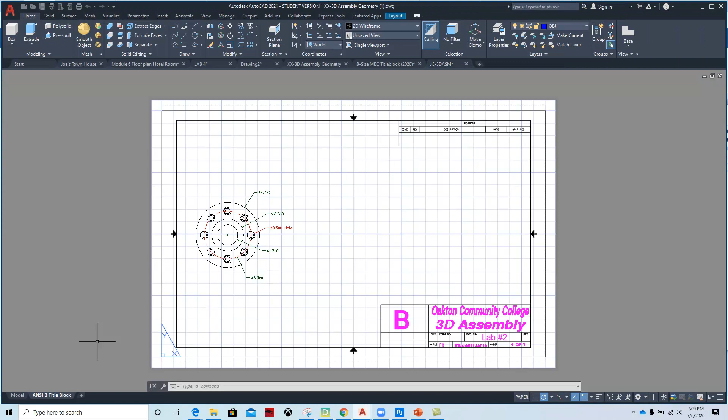What I've given you is the title block, and the two-dimensional geometry, because this exercise is really a very symmetrical exercise which uses the same geometry. We just extrude it up for the top assembly piece and down for the bottom piece.

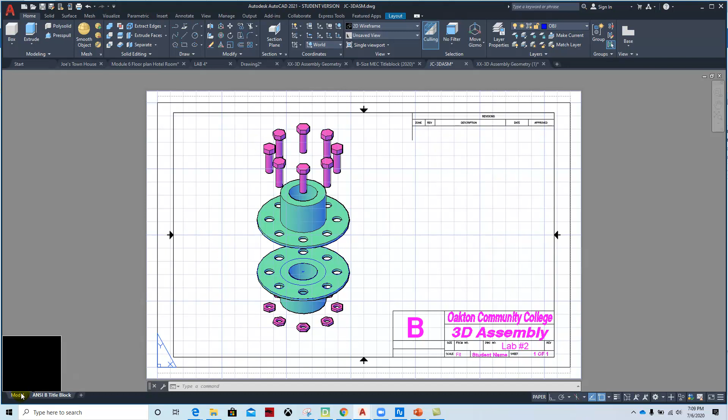So what we'll do then is we'll switch over to model space, and then we'll grab a top view. I'm still in my master drawing, so let me switch over to the drawing. Here we go. So we'll go to model space, and we'll just pan and zoom to take a look at that.

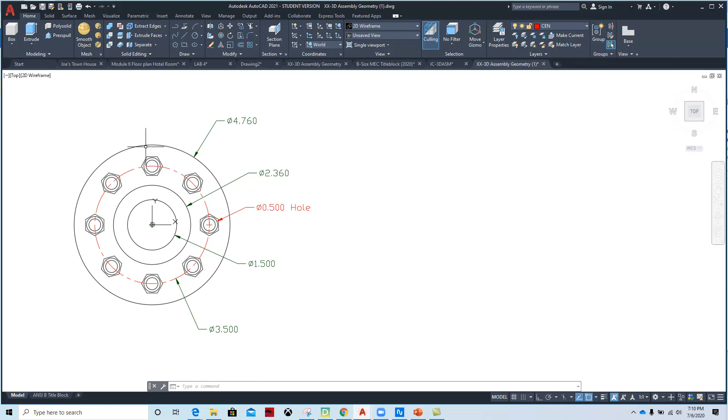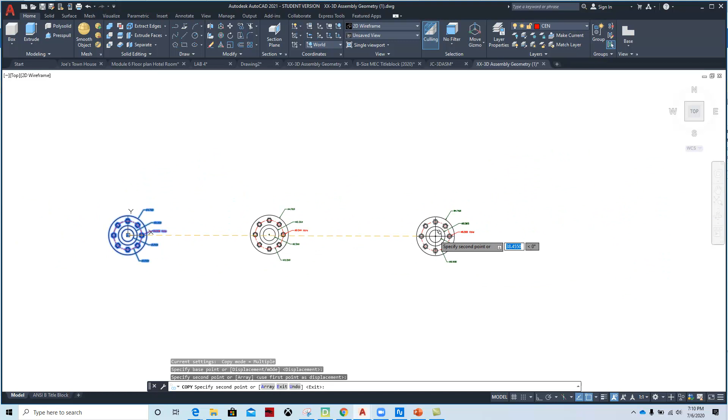Basically what we have is a circular shape with a bolt hole pattern. So what I'm going to do is go through and copy that, two times. I'm going to select the base point, and drop a part off right here, and then drop another one off here. Now I'll hit escape. So I took the one and copied it twice.

I'm going to keep this one for the 2D geometry, and this one I'm going to turn into 3D. I don't need the dimensions, so I'm going to delete those. I don't need the center line.

To model this, we're going to switch over to the 3D modeling interface. I've already got it on there, so I'll switch to the 2D so you can see that, and then I'll switch over to 3D.

What 3D modeling does is it gives you a different menu set to work from. So the next thing we're going to do is put the bolts onto a layer, and turn that layer off.

So I'm going to go to the layer command, I'll just type it, L-A-Y-E-R. I have a difficult time between interfaces finding things like layers and buttons, and if you type the commands, it works very quickly.

On the layer command, I'm going to make a new layer, and I'm going to call it nuts dash bolts. I'm going to make the color for that purple, and give these a line weight of 0.5.

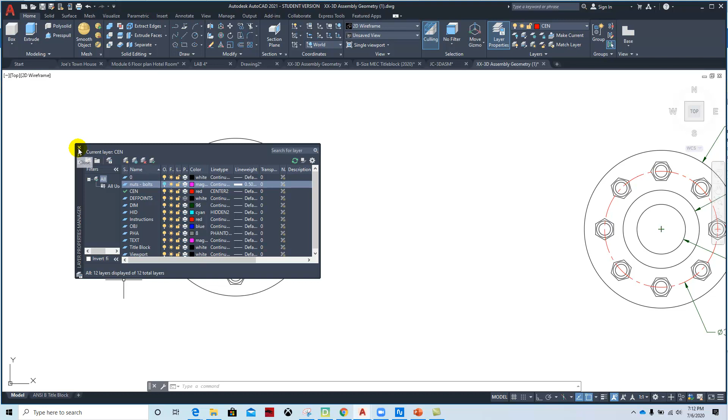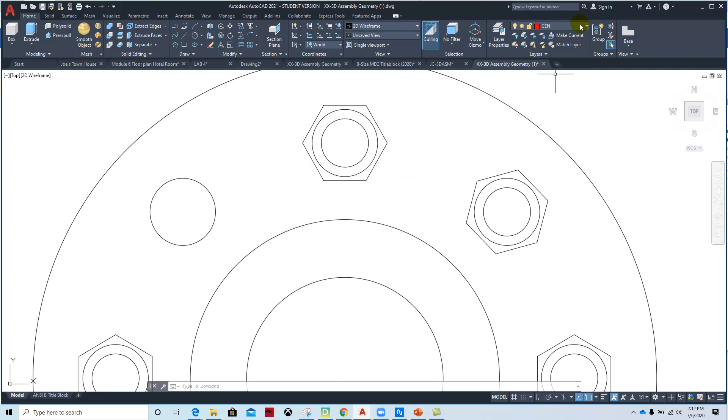Then I'm going to put that geometry on the nuts and bolts layer. If I turn that layer off, you'll see the items disappear when I do it. So I'll click on the geometry for one of the nuts or bolts, and put it on that layer. Here's my layer, I'll put it on my nuts and bolts layer, and it'll disappear. If I turn that layer back on, you'll see the geometry.

The reason I'm doing it this way is it's much quicker to use a press pull command than it is to use an extrude command.

So I'm going to do the same thing again. I'm going to go and put these on that layer, I can just click on them with grips. Then I'll go over here and put it on the nuts and bolts layer, and close it. I'll do the same for the other ones.

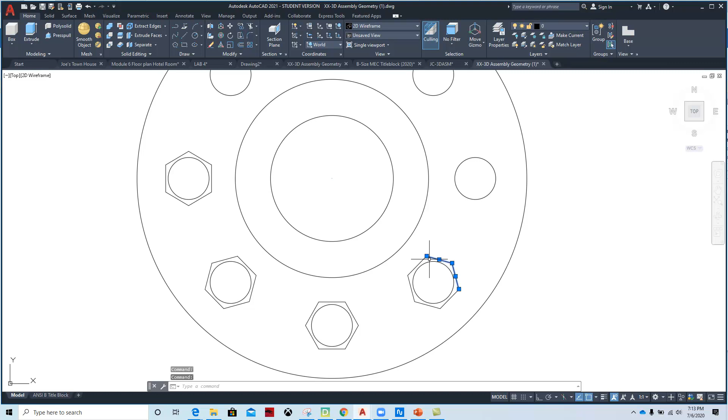You don't have to do them all at once, you can do some of them at a time. You'll notice they'll disappear as I do them, because I've turned the light bulb off on the nuts and bolts layer. So by using layers, it helps you clarify what you're working on without having so much geometry.

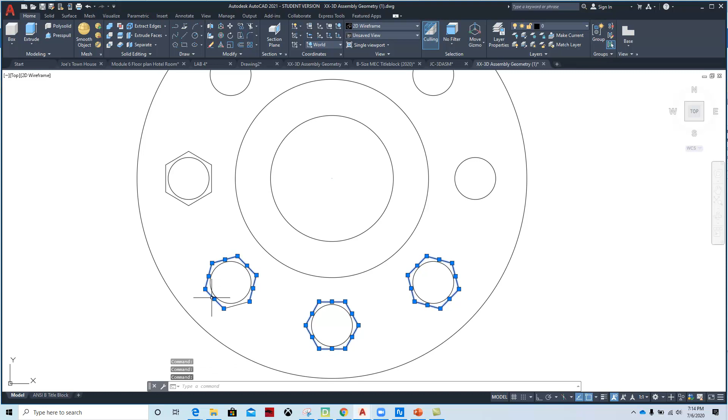And I've got one more left.

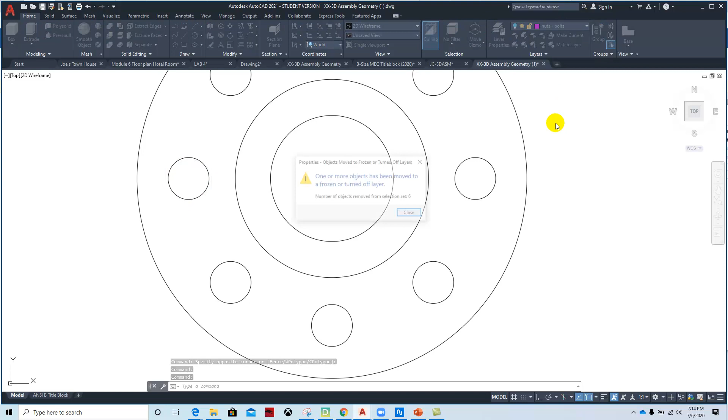Now that we've done that, the next thing we're going to do is press pull this part. I'm going to switch over to layer object, and then change my viewing angle to a southeast isometric.

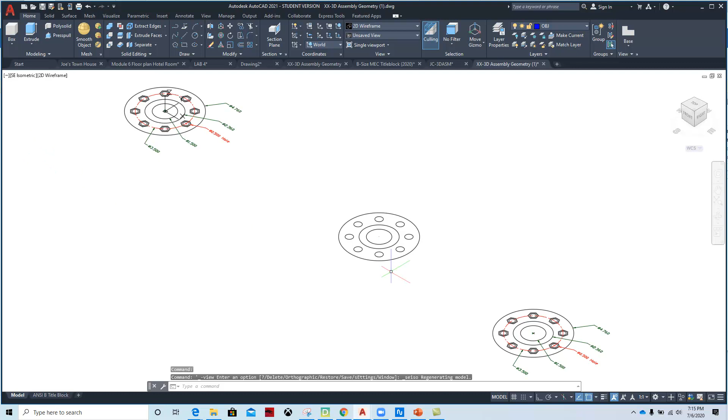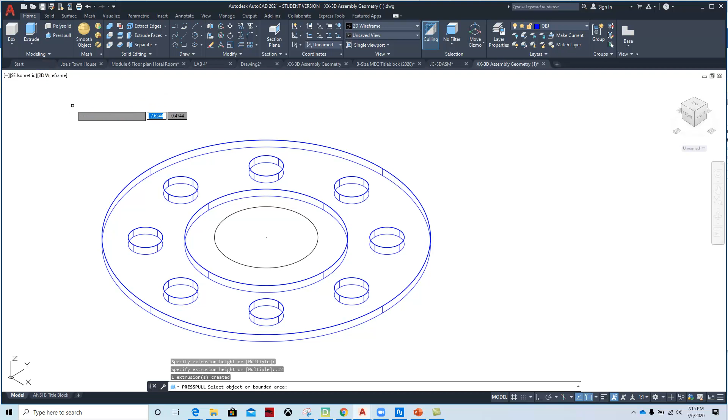I'll zoom in on it, and then press pull this down 0.12, which is on the dimensions. So I say press pull, hover, click, push down, 0.12, enter. Then if I want to, I can verify this by hitting escape or right clicking and going to conceptual. You can see it pressed and pulled the geometry.

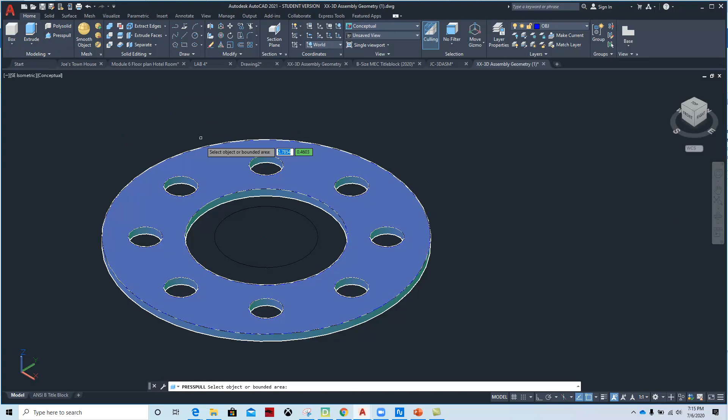Now if I want to pull this up, I can pull it up in the other direction, and it's going to be 1.75, which is the dimension of 1.63 plus 0.120. So I'll say press pull, hover, click, pull that up, 1.75, enter. I'll hit escape. Now you'll notice these two pieces have been modeled, but they're separate.

I can say move, and I can separate them. So I'm going to hit escape here, or undo.

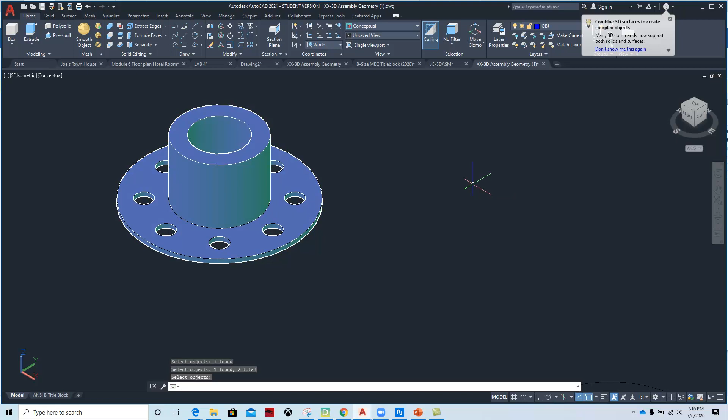What we want to do is create a Boolean property called union. So what I'll do is say union, select this geometry and this geometry, and hit enter. What that'll do is fuse them together. So now if I try to move it, it'll treat them all as one piece.

So if I say move, select it, it does leave the initial geometry underneath it, which is really pretty cool because we can use that instead of making a copy. But at this point we'll leave it the way it is, so I'm going to undo that.

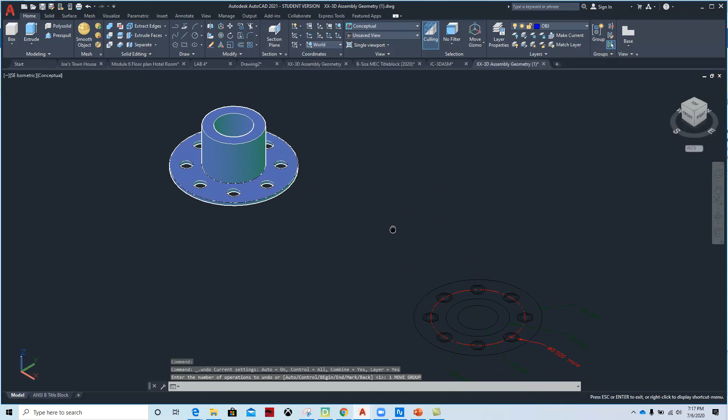Okay, so that's how we would do the top part of it. And then what I want to do is turn on the layer for the nuts and bolts.

I'm going to go out of conceptual to 2D wireframe, and I'm going to need to move this other geometry up. So I'll toggle over and switch to my nuts and bolts layer, click on it, and then turn off my object layer. Then I'm going to grab the nuts and bolts and move them up.

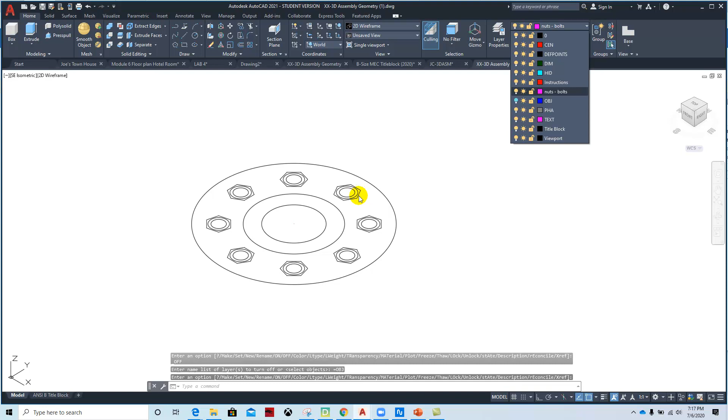Now that we've modeled this component, we're going to model the bolts that go above it. So I'm going to change from conceptual to 2D wireframe, and I've turned on the nuts and bolts layer. If you turn off the nuts and bolts layer, and then turn it back on...

The next thing I'm going to do is move these up in the Z-axis, using the 3D move command. So I'll say 3D move, select this inside circle, hit enter. Then I can grab the rocket and just drag that up. I'm going to move that up 3 inches. Then I'll do the same for the other geometry around here.

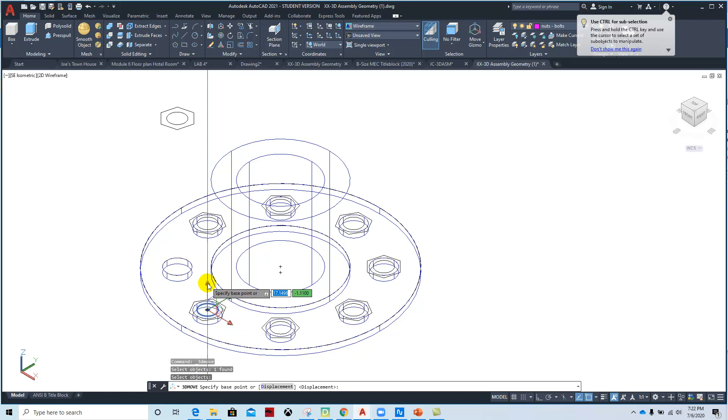So I can say 3D move, hit enter, grab the rocket, and then you can either bring it up with O snap, you can see it object snaps to the center, or I can just type in 3 and it does the same thing. So one more time, 3D move: grab this circle right here, hit enter, grab the rocket, push it up, type 3, enter. And then do the same for the geometry around it.

3D move: build your selection set. And if you grab something like I did here where I have the wrong one, hold shift and unselect it. So now that I have the geometry that I want to move, I hit enter, grab the rocket, and then go 3, enter. For some reason it doesn't seem to want to grab that other geometry, so I'll just do it again. 3D move.

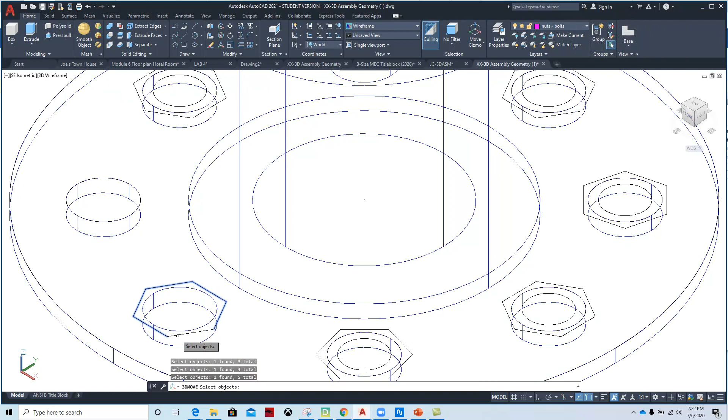Enter, grab the rocket, 3, enter. Now you can take the view cube and spin it, and see the different angles, or you can hold the shift key and turn it with shift middle mouse wheel. So what I'm going to do is move the rest of these up.

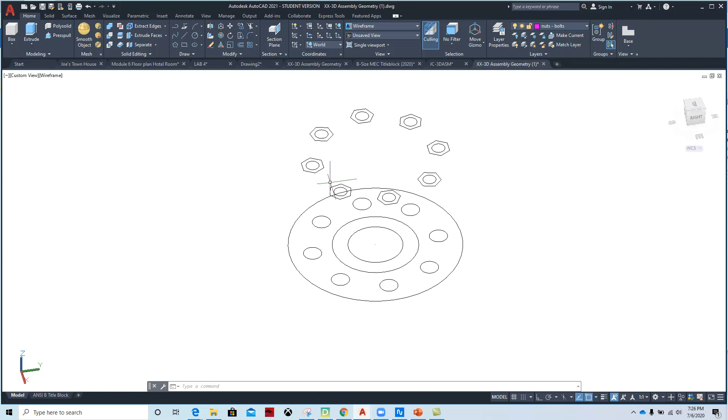All right, so I've 3D moved all of the bolt patterns to a height 3 inches above it. If I turn my object layer back on, you can see it. If I hold shift and push the middle mouse wheel, I can rotate it, and you'll notice that the view cube moves as well.

And then what I'm going to do is take these objects and extrude them. Now before I do, I need to join these shapes. So in order to get these to work, I need to make these shapes from individual lines into a continuous boundary. And the way I can do that is with the region command.

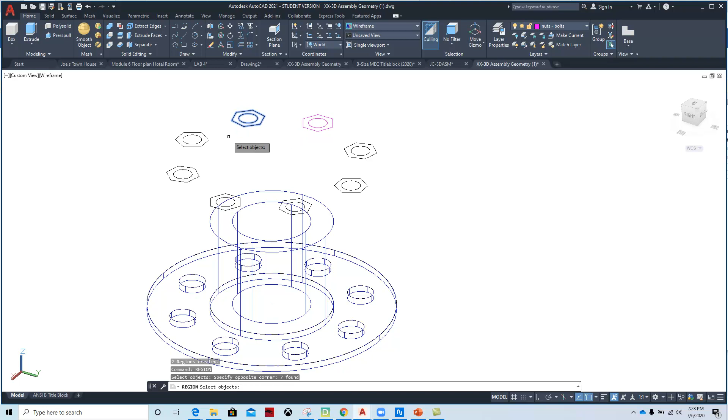So I can type in region, and then put a box around it and hit enter. And that'll create a shape out of that. I can do the same thing. Region, enter. And I'm doing them separately. I don't know if it'll group them if I do them all together.

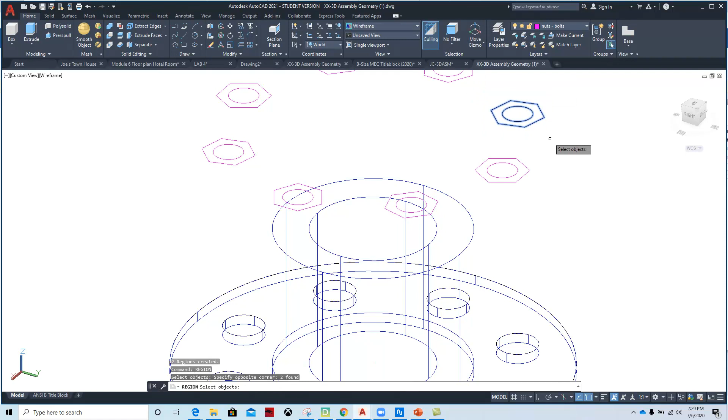If you go and select with a blue window, then it will only select what's completely within it. All right, so now these are extrudable as solids. So what we'll do is extrude down 1.25, the shaft of the bolt.

So we can say extrude, or we could say press pull. Let's try press pull. We'll click and bring that down. Nope, extrude. Enter. And we'll say 1. Enter. So that does work.

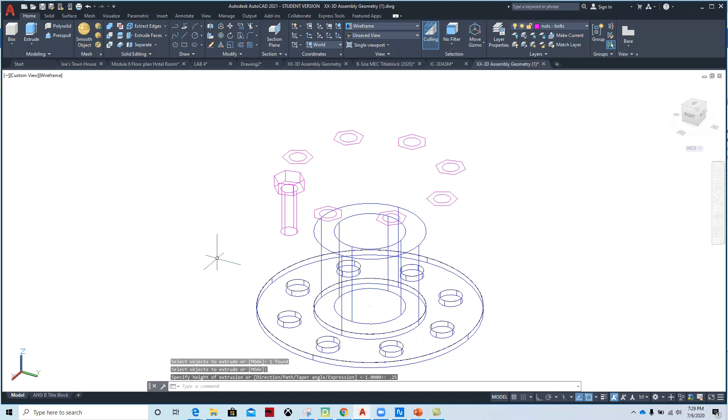And then we can extrude these up the other direction, 0.25. So we can say extrude, select that, hit enter, and then go up 0.25. And then remember that they're separate, so we want to union them. So we'll say union, and then we can select these two shapes, and it'll fuse them together.

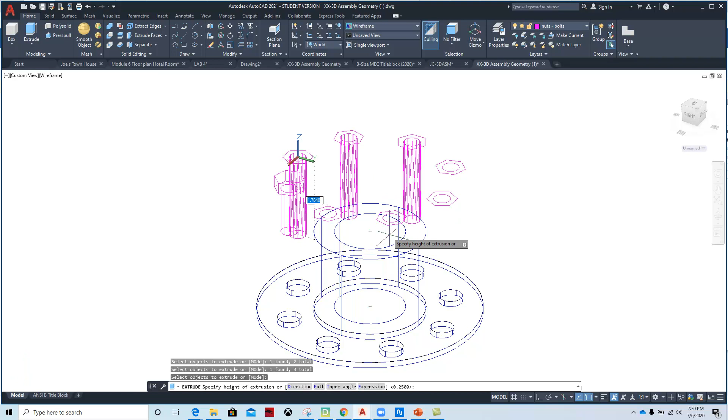So again, it's extrude, and then we can select this, and we can do more than one at once. Hit enter, type in 1, and then extrude, we'll go the other way, 0.25.

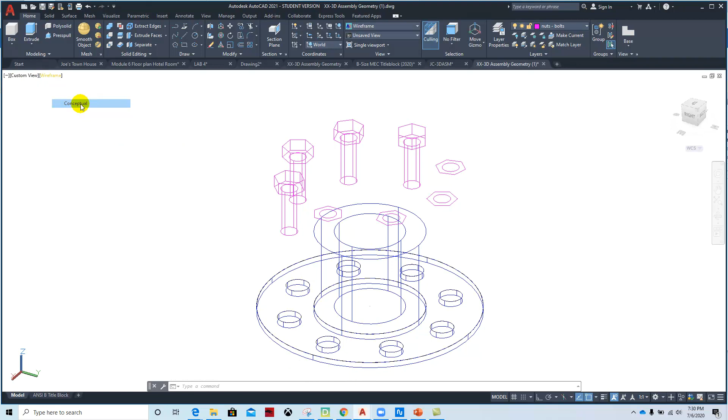And we can change the visual style, and you can work it if you've got a decent graphic card. Extrude. Enter when you're done selecting. 1 inch. Uh-oh, undo that.

One inch, and then the other way, 0.25. Then we'll union these so that they stay together. And when I union them, I union one bolt at a time.

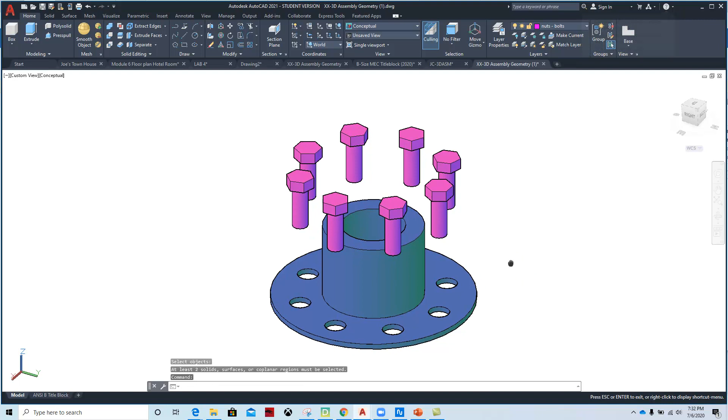Okay, so that completes the top half of the exercise, and then to do the bottom half, it's pretty much the same except in reverse. So what I'm going to do is move this geometry back to a top view.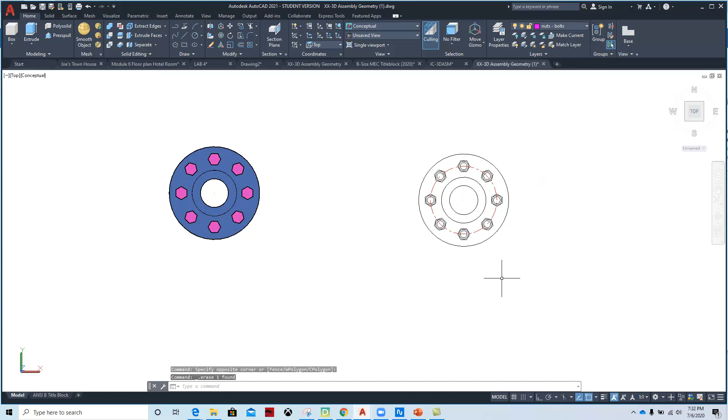And we made a second copy of it over here. So what we can do is just clean this geometry up just like we did the other one. And then we're going to do the same thing, except we're going to go down in the other direction for it.

Now, again, I needed to put these on the nuts and bolts layer so that I can turn them off. So to do that, I can just click on these things, and then put it on the nuts and bolts layer. If you don't do it, it's not a huge deal, it just makes it a little bit easier. So I'm going to put these geometries on the nuts and bolts layer.

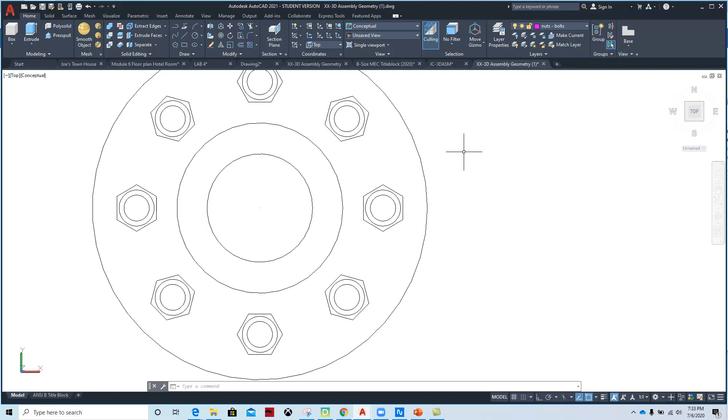Okay, so I've put these on the nuts and bolts layer, and what I'm going to do now is turn off that layer. And then I'm going to make the object layer active, and extrude these in the other direction. So I'm going to go to an isometric view.

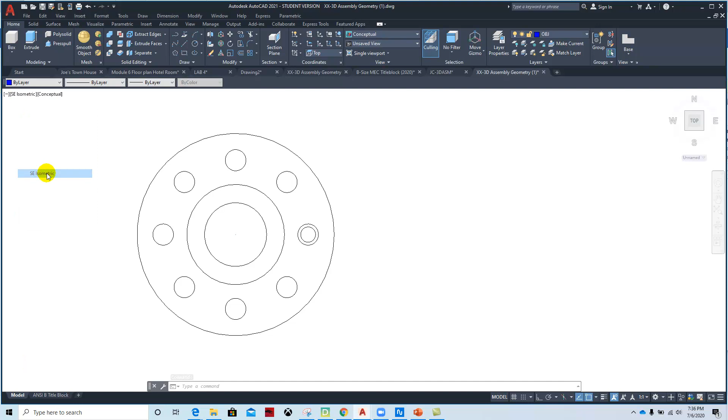And then I'm going to come over here, and extrude these in the other direction. Now it looks like I missed one, so I'm going to put that on the nuts and bolts layer, and it'll disappear because that layer is turned off.

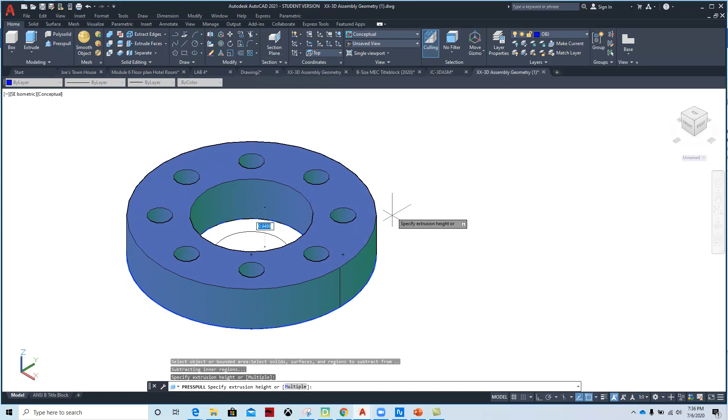And then what I'll do is I will press pull this down. Actually I want to go up on this one because, let's see here. Let's press pull this one first, 1.75. Enter. And then let's press pull this one, 0.12. Perfect. Union them.

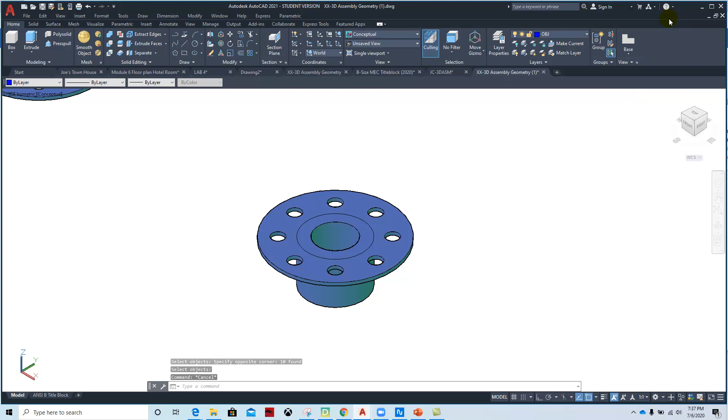Turn on the layer for the nuts and bolts so you can see it. And then what we're going to do is move these down with the 3D move command. So I'm going to turn off the object layer, and make the nuts and bolts layer active. And then I'm going to move them with 3D move. So we'll say 3D move.

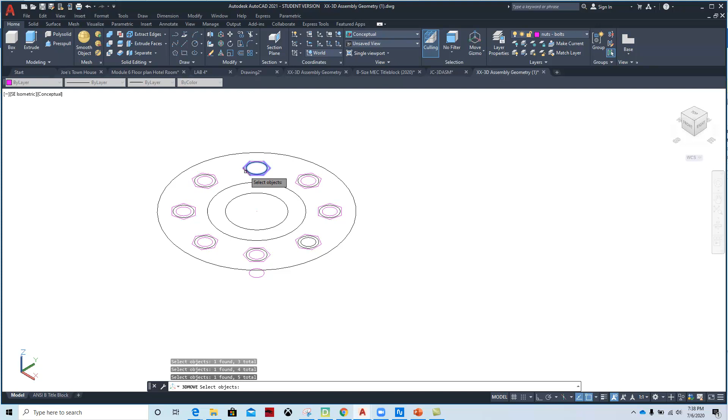And then I'm just going to remove this part by holding shift or clicking on it. There we go. Enter, rocket, down 3. And so that's the geometry that I want.

There are some quick ways to do this rather than doing it over and over again. I could make it into a region, and then array it. That would save quite a bit of time. But at this time, I'm just going to pause and 3D move all of these down 3 inches.

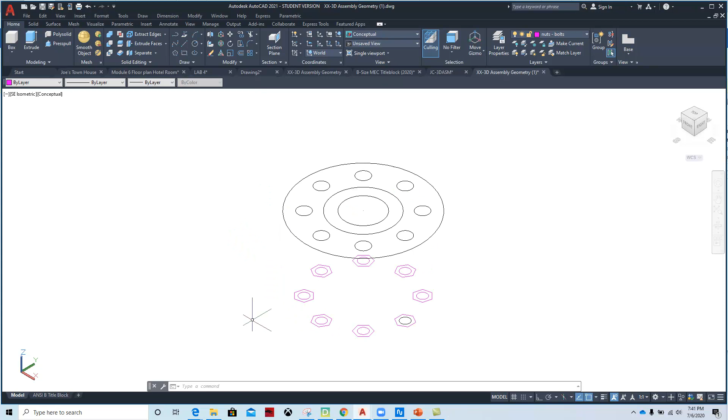Okay, so we've gone through and we've 3D moved these down 3 units, and then it's very similar to the other type of extrusion. Now again, we need to create regions because you cannot extrude a single line. I mean, you can do it, but you'll get sort of like a spider web kind of a thing, and it doesn't look like a spider web in conceptual.

It looks like a spider web in 2D wireframe. So if you see this, that's not going to work because it's not going to be a solid. It'll work for visualization, but for 3D prototyping, what we need to do is create regions. So what we'll do is we'll say region, put a box, enter, right click, repeat, do it again, enter.

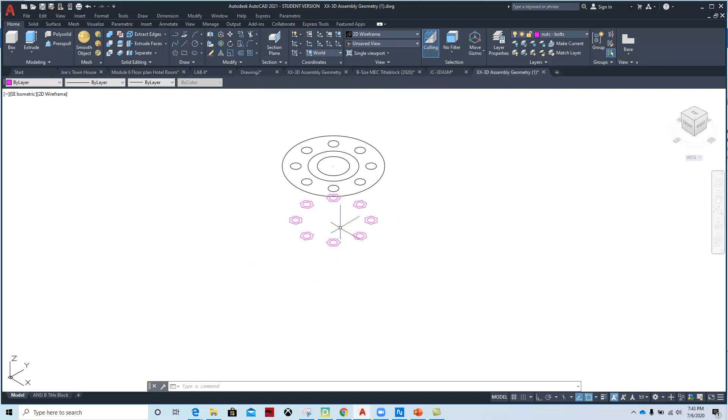And this one's already a region. Okay, so now that we've created them as regions, what we're going to do is press pull them, and we're going to go with a thickness of 0.25. And so I'm going to turn on my other layer, my object layer, so you can see that.

And then I'm going to say press pull, however, press pull can be a little more difficult to use. So we're going to use extrude. We'll grab these, hit enter, and then we'll say 0.25.

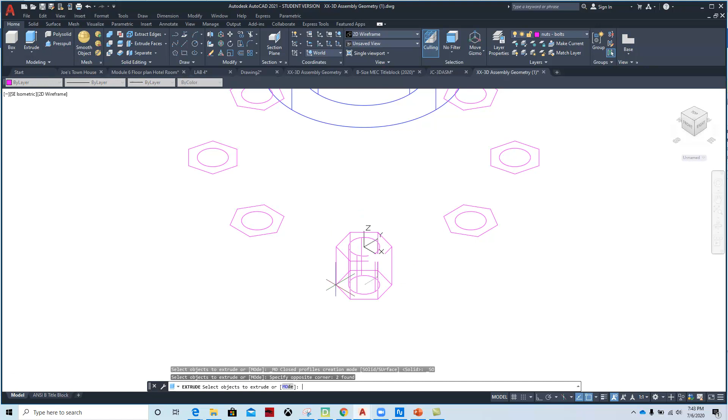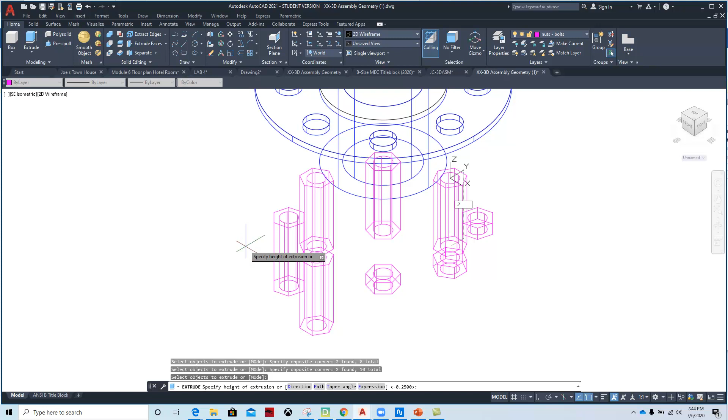And we'll do that repeatedly. Enter to end the selection set, 0.25. And then if we shade them, you'll see the holes aren't there.

So we'll have to subtract those. And so we'll say subtract. Select the large piece, hit enter, and then the smaller piece. Repeat. Enter. Large piece, enter, small piece.

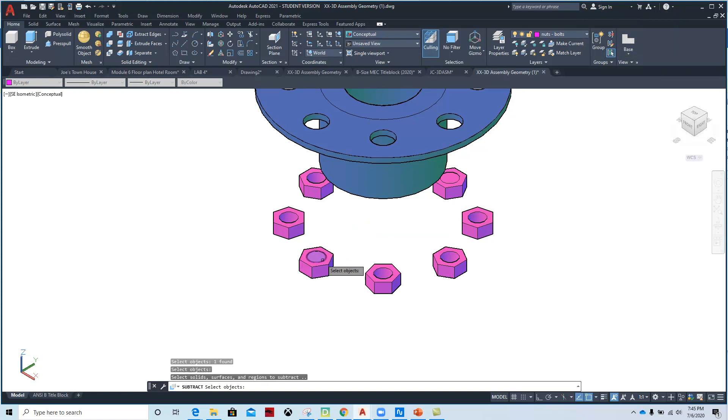Now that one I didn't get it because I tried to subtract 2 of the same pieces. All right, and there's one more, shift middle mouse wheel.

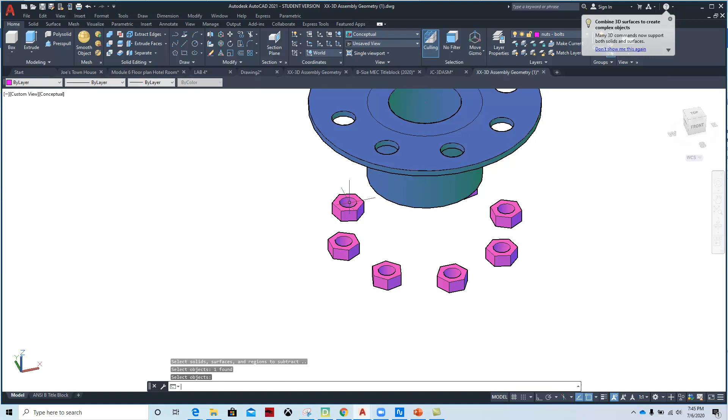Okay, so if we take a look at this exercise, the last part would be to kind of center them on top of each other. And so the way to do that is to draw a line from the center here straight up. And if you get the plus Z like that, you're in great shape. So I'm going to say, let's go 4 inches.

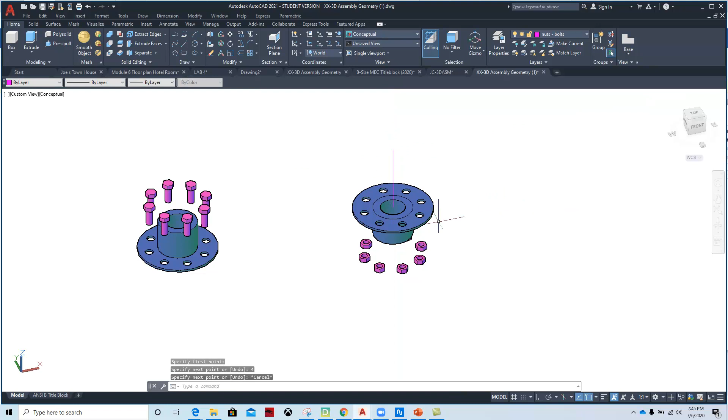We'll hit escape. And then what we're going to do is we're just going to move the one on top of the other. So we'll say move, select it, hit enter. And then we're going to move it from the center to the end point. And I've got my OSNAPs on. So now I've got the parts oriented properly.

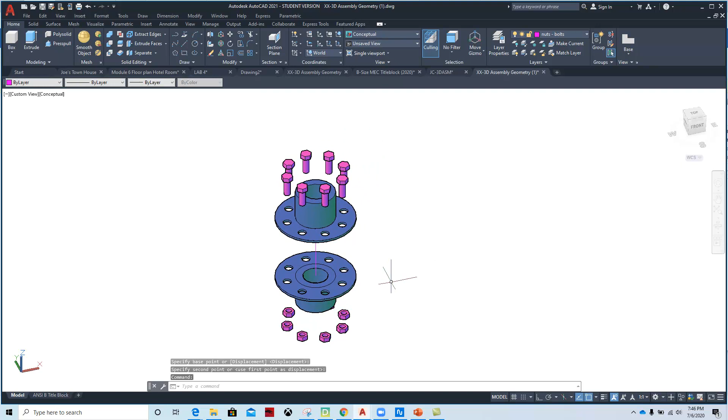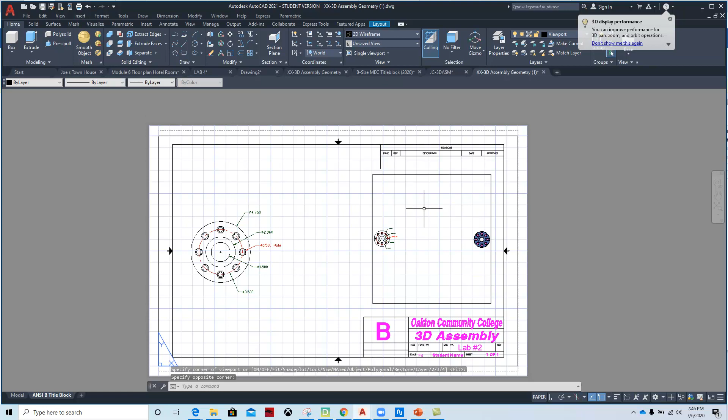I can go to the title block. And what I can do is create a viewport for that. So what I'll do is I'll go down to my viewport layer, and I'll say View, Viewport, One Viewport. I'll double click in that viewport, and then I'll change that to a southeast isometric view. And I'll center it in there.

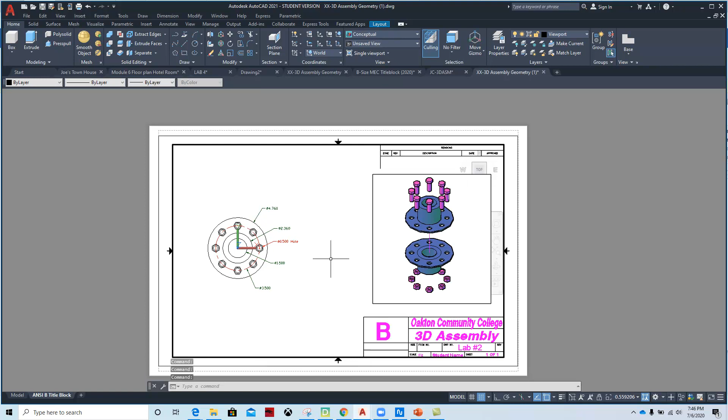All right, I'm going to leave the 2D geometry just like that. I'll double click outside here and put my name on the title block. And I'll save the file.

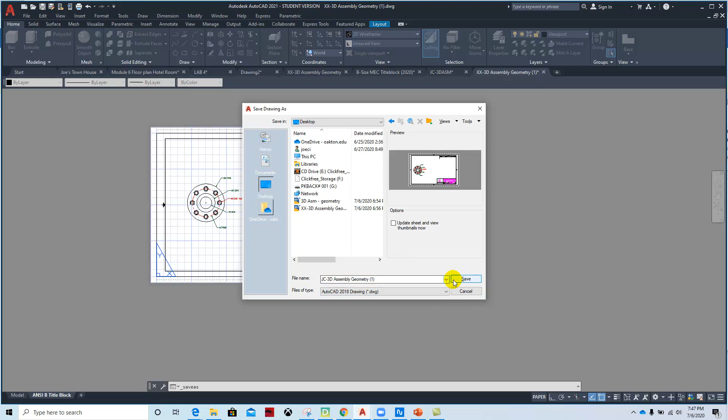Save them as your initials. All you really have to do is change the XX to your initials. And that completes exercise 6, 3D assembly.